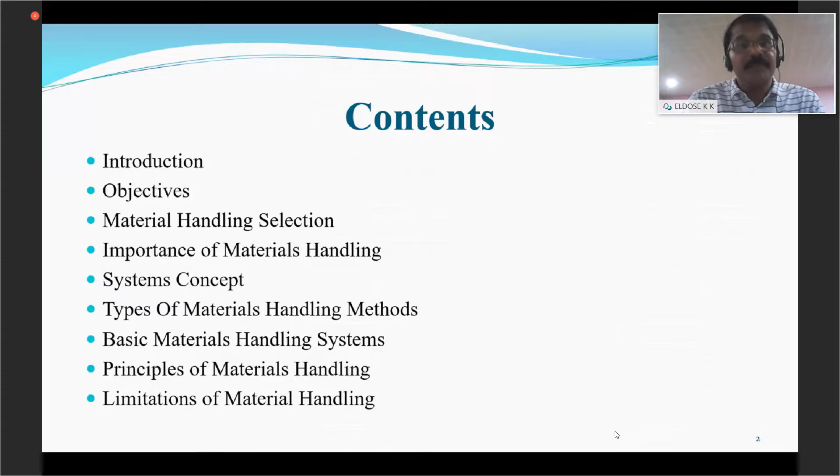So we start with introduction. Material handling means providing the right amount of the right material in the right condition, at the right place, at the right time, in the right position, and for the right cost by using the right method. We have to look into each term mentioned in this introduction statement very seriously.

It means providing the right amount of the right material. Right amount means the right quantity. So for a particular workstation, this much quantity of material is required. The material handling system shall be capable of transmitting that much amount of material to that particular workstation. That is what is meant by right amount, meaning right quantity of the right material.

Right material means the correct specified material reaching the workstation in the right condition. Right condition means it must be in usable form. There shall not be any damage while transferring materials from one place to another. So the material handling system must be capable and efficient to handle the material in safe condition, as well as deliver it at the right place.

A particular material is required for a particular workstation or workplace. That material shall be placed and transmitted to the right place at the right time. We all know that in a production scenario, scheduling is there—a particular time is allotted for a particular material. So raw material, in-process material, or finished material shall reach the particular work center at the right time, right position, and right cost—meaning we have to utilize all these cost-effectively.

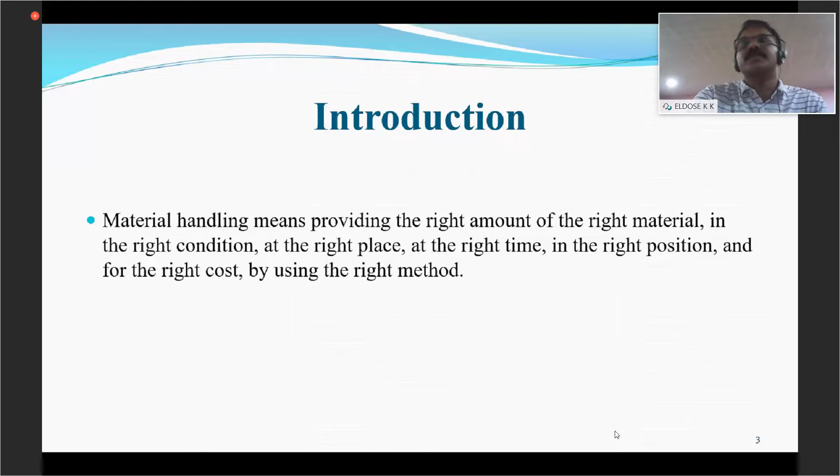Another aspect is that it applies to the movement of raw materials, parts in process, finished goods, packing materials, and disposal of scraps. So while transmitting or transferring materials, it may be in the form of raw materials, partially working condition material or part in process, finished work, packing materials, or scrap.

When we design any material handling equipment, it shall be capable of transmitting raw materials, in-process inventory, finished stock, packing material, as well as scrap.

Scrap is also very important because sometimes in big industries, scrap itself is huge—the weight may be enormous. So the handling systems must be capable enough to handle the scraps as well.

In general, hundreds and thousands of tons of materials are handled daily, requiring the use of a large amount of manpower, while the movement of material takes place from one processing area to another, or from one department to another in a particular plant. That means huge manpower is required.

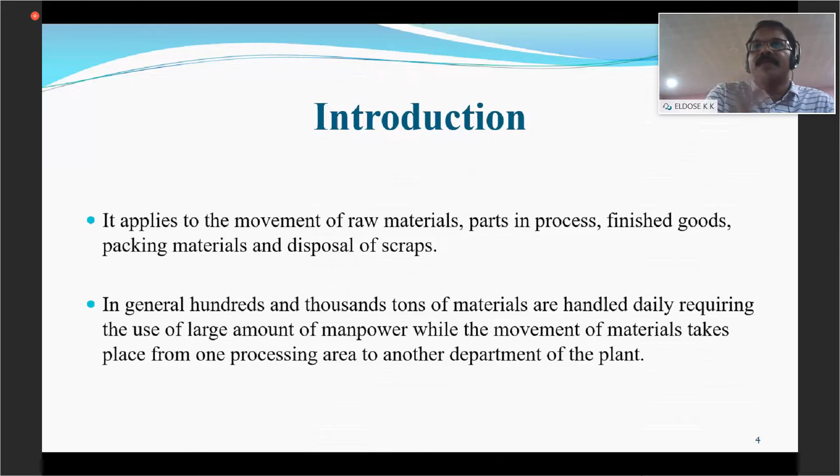Similarly, thousands of tons of material need to be transmitted, so it is very tedious work. We have to be very serious and take it into serious consideration in material handling, as far as an industry or production plant is concerned.

The basic definition of material handling is that it is the movement and storage of material at the lowest possible cost through the use of proper method and equipment.

Material handling involves two aspects: one is movement, the second is storage. Whether it is raw material, process material, or finished goods, we have to move that material as well as safely store it at a particular place, or keep it in inventory.

Both of these aspects must be done effectively, the cost shall be minimum, and proper method and equipment shall be used for transferring as well as storage of the material.

Another definition: material handling comprises all of the basic operations involved in the movement of bulk, packaged, and individual products in a semi-solid, solid, or liquid state, by means of machinery and within the limits of the place of business.

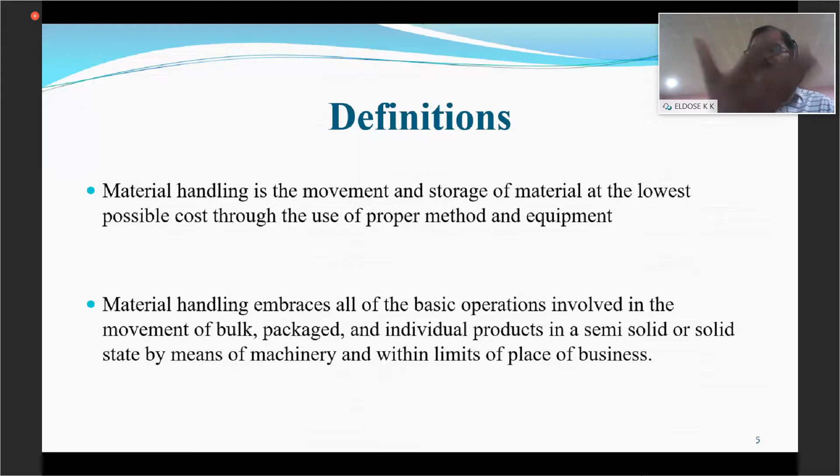Sometimes we have to transfer bulk material, sometimes unit material like individual products. The state of the material may be liquid, solid, or semi-solid. So according to the requirement, we have to design the material handling equipment for that particular plant.

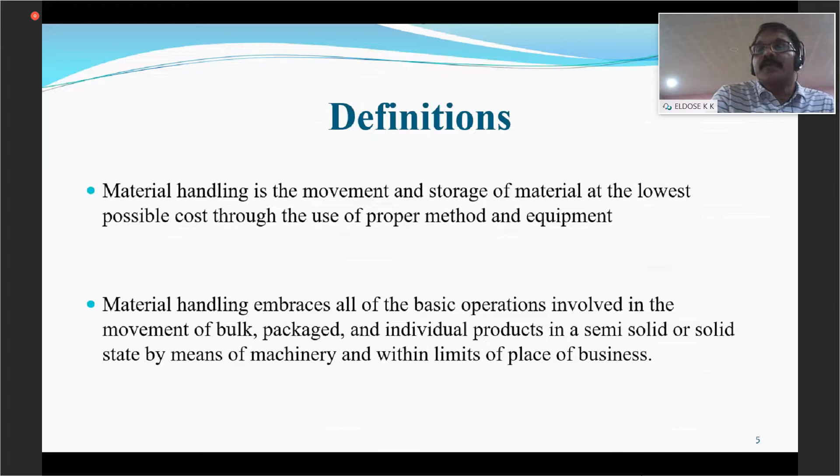The next one is the objectives of material handling.

The primary objective of material handling is to reduce the unit cost of production. In any manufacturing facility, the primary objective is to minimize the total cost or maximize the profit. In overall cost, one part is contributed by material handling, so if you reduce the cost of material handling, you can reduce the overall cost of production and maximize the profit. This is the main objective.

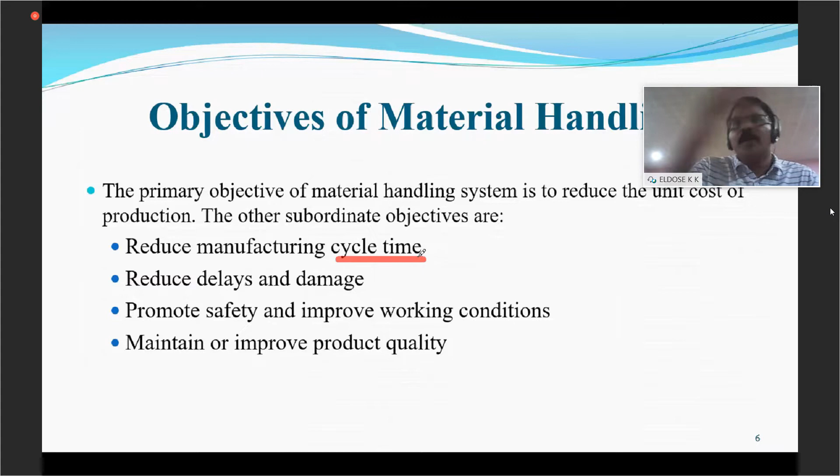Then the subordinate objectives are: reduce manufacturing cycle time. This is very important. What do you mean by cycle time? Cycle time means the overall time required for completing a particular product. During that operation time, some time is definitely required for material handling. So if you optimize the time requirement, you can reduce the overall cycle time for that production. So cycle time reduction is very important as an objective of the material handling process.

Then, reduce delays and damage—that point is also very important.

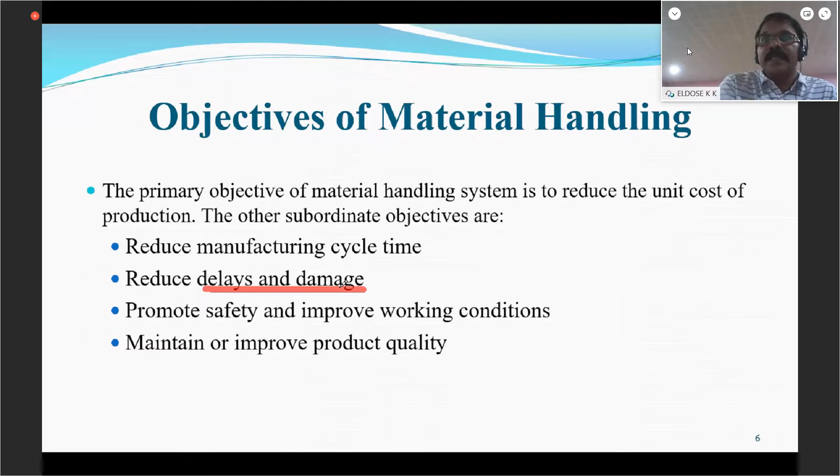Reduce delays and damages. For example, take an overhead crane used for transferring material from one place to another. When material is being transmitted through the crane, if some activity is carried out underneath, there may be a chance of an accident occurring. So we have to avoid that, as well as avoid unnecessary delay during the transmitting time. These two aspects are very important as far as the objective is concerned: delays and damage shall be reduced.

The third objective is promote safety and improve working conditions. In any industry, safety aspect is very important, and we have to take care of the machinery and the human beings. So we have to promote safety-enhancing techniques and activities, and improve working conditions. When you enhance safety, definitely the working conditions will be improved.

The fourth point is maintain or improve product quality. During the transfer of material from one workstation to another, we have to ensure that quality. Whatever the end product quality, the same quality we have to ensure during the transmission time as well. For example, suppose material is transmitted through a belt conveyor, and products placed on it are being moved from one place to another. During that transfer, there may be some hit in between workstations, so the surface finish may get damaged. So we have to ensure product quality during material handling as well.

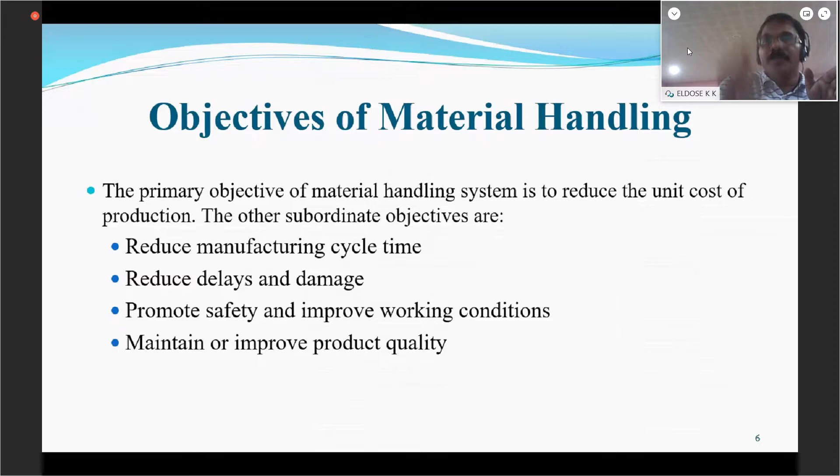Another objective is to promote productivity, meaning we have to increase the production rate. In order to enhance productivity, we have to follow straight line transmission, so material flows in a straight line, avoiding zigzag and unnecessary movements. We have to decide an optimum path and accordingly install or erect material handling equipment, so material moves as short a distance as possible. While transmitting material from one place to another, there are different paths, so we have to optimize the path so that the distance moved is minimum.

That is another objective. The next objective in this session is use the gravity concept. Wherever we can implement the gravity concept, we can use it so that we reduce energy and power requirements, because no energy or power is required if we utilize gravity. We can transfer material from a higher level to a lower level using some path, following the gravity concept wherever possible, which reduces energy and also enhances productivity.

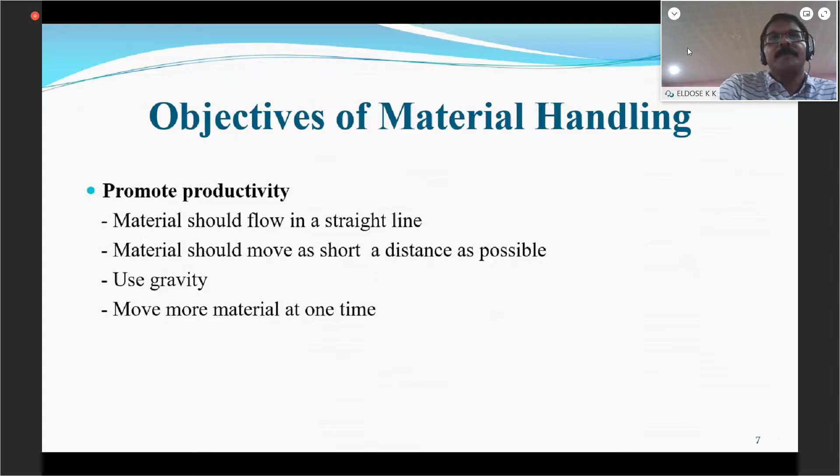Another aspect is increase the use of facilities; we have to enhance facility utilization. The first point is promote the use of building cube - we have to utilize whatever building area is available. Then purchase versatile equipment, meaning equipment that can perform different operations. Instead of using stringent, single-purpose equipment, we can purchase equipment that can be utilized in different environments and situations. So purchasing versatile equipment is very important.

Then develop a preventive maintenance program. Preventive maintenance is routine maintenance carried out in order to avoid breakdown. According to the requirement of different material handling equipment, we have to design different preventive maintenance programs. For one particular equipment, a certain procedure may be followed, but it may not be suitable or effective for another. So for another piece of equipment, we have to design another preventive maintenance program in order to avoid breakdown.

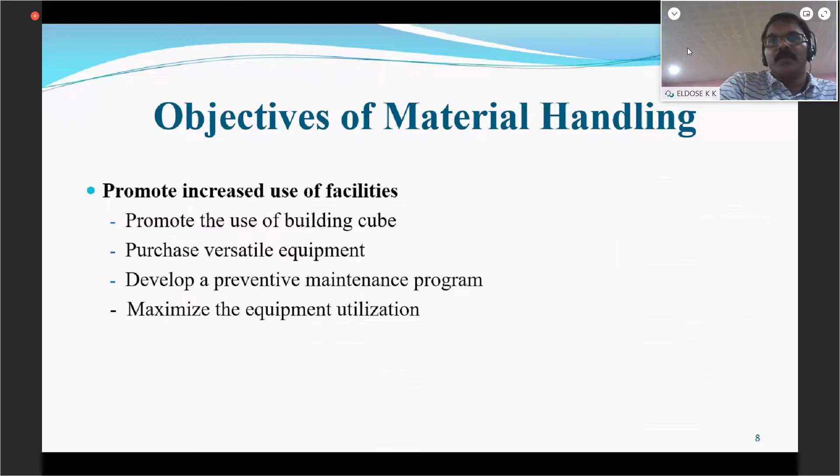Then maximize the equipment utilization. As we all know, equipment is available to us for 24 hours, so we have to utilize it at the fullest level - maximize the equipment utilization. These are the objectives that come under this particular category: promote increased use of facilities.

Next topic is material handling selection. There are different factors. First one is the properties of the material, whether it is solid, liquid, gas, and its size, shape, and weight. According to this heterogeneity, we have to design the particular handling equipment.

Take all these factors into consideration while selecting equipment. The second point is layout and characteristics of the building. Suppose for a particular plant the roof level is low, so we could not implement heavy material handling equipment. If it is a multi-story building, we have to select equipment accordingly. So based on the layout and characteristics of the building and plant, we have to select the handling equipment effectively. The next one is the production flow.

Production flow means whether it is continuous production, job shop, or batch production, we have to use different techniques. Continuous production means mass production, where the same quantity and type of material is produced for a particular period of time. For example, thousands or lakhs of the same nut and bolt produced in a month. That is called mass or uniform production. In that scenario, a conveyor belt is an apt choice. So according to the production scenario, we have to design the material handling equipment effectively.

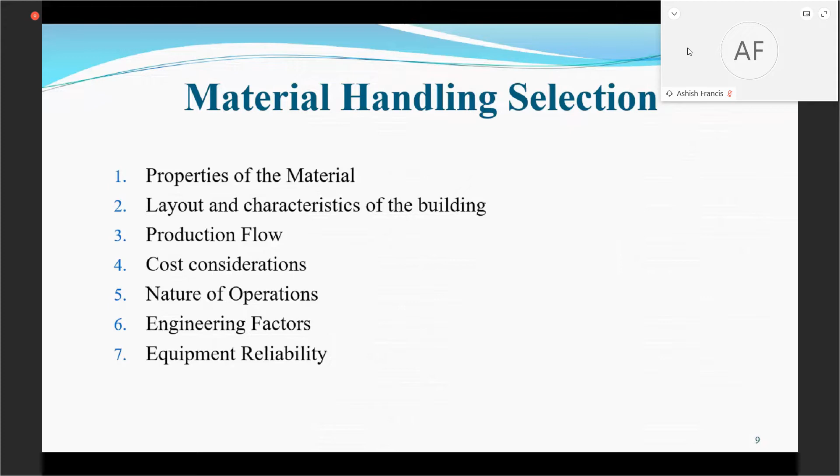Next topic is importance of materials handling. This is a summary of what we have discussed so far.

It improves the efficiency of the production system, and it's self-explanatory that it cuts down the indirect labor cost. It reduces damage of materials during storage and movement, as mentioned earlier. It maximizes space utilization through proper storage of materials, thereby reducing storage and handling cost. Using this, we can reduce the overall cost.

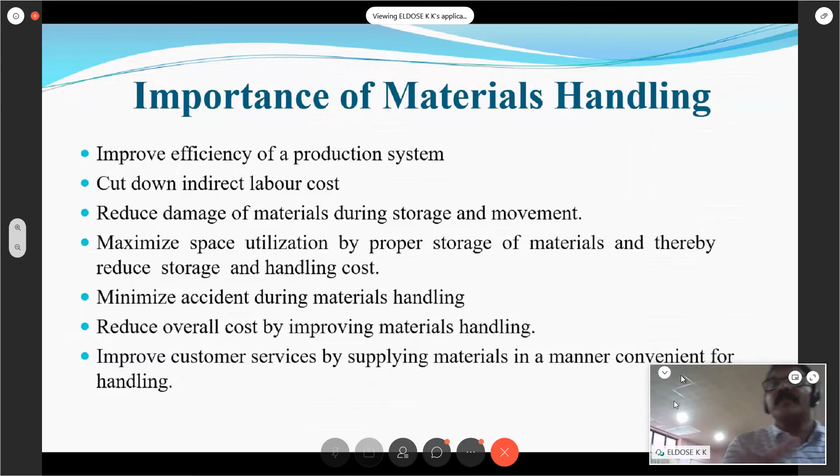Then it minimizes accidents during material handling, which is a very important safety aspect. It reduces overall cost by improving material handling, and it also improves customer service by supplying materials in a convenient manner for handling. So these are the importance of material handling.

The next important topic is what are the factors to be considered while designing a material handling system. The first factor is material.

The form of material, whether it is gaseous, liquid, semi-liquid, or solid, determines how we classify material handling systems. If it is a liquid, toxic, or corrosive material, we can use containers. If it is semi-liquid or powder, we can also use containers for transferring materials. If it is solid, we can use overhead cranes, hoists, or trucks.

The next aspect is nature, whether it is bulk, unit load, individual items, fragile, sturdy, or bulky.

What is a unit load? It means the same material with the same dimensions and similar appearance. For example, take a brick - different bricks have the same size, dimensions, and appearance. Similarly, if you place ten such bricks in a casing, that may be considered a unit load and loaded onto a truck. That is what is meant by the unit load concept.

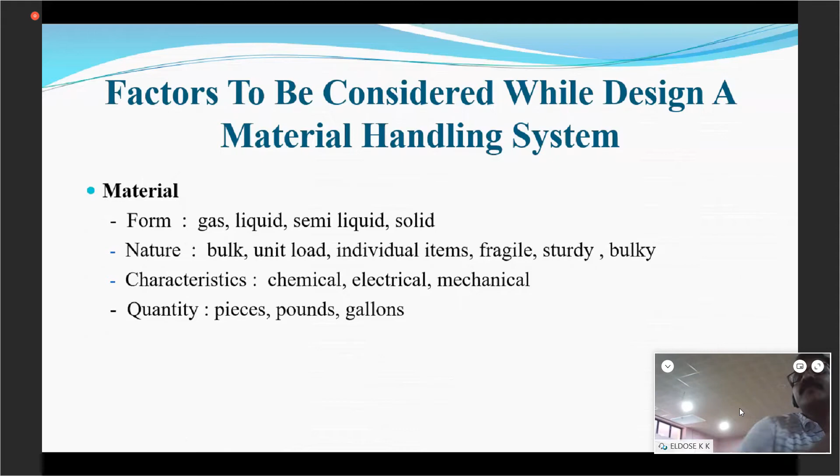Whereas bulky means the material size may be different, so for bulky material transmission we have to use different material handling equipment. If it is fragile, we have to use equipment accordingly, and if it is sturdy, we have to use equipment accordingly as well.

The next factor is characteristics, whether chemical, electrical, or mechanical. Accordingly, we design and select equipment as per the requirement. Then quantity, whether in pieces, weight in pounds, or liquid form in gallons, is another factor to consider in the design.

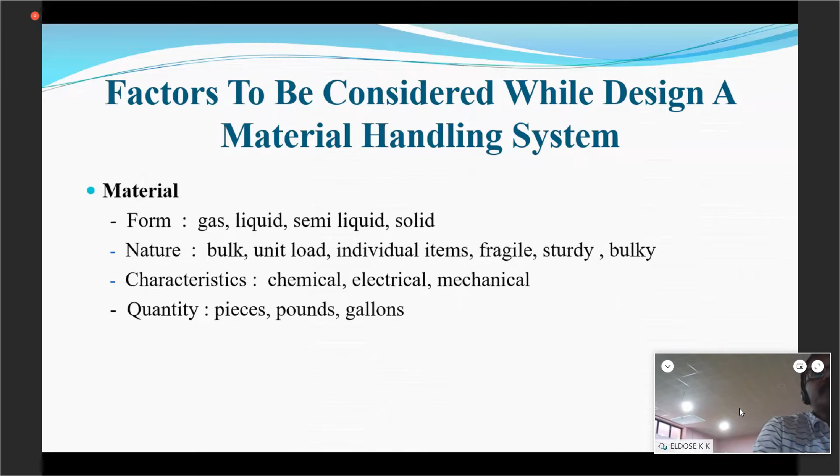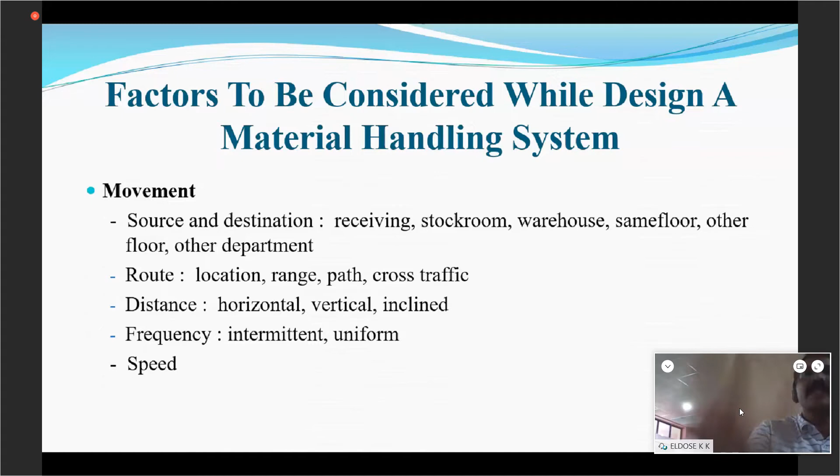Then frequency - whether it is intermittent production or uniform production. Uniform production means continuous mass production, while intermittent production also requires accordingly designed systems. Then speed is also very important - the speed at which material is being transported is another factor.

Another factor is methods - whether unit or load, manpower, or equipment. Whether it is bulky items, individual items, or container items, we have to consider this factor. Manpower means whether a single person or several people are involved, or none, meaning we can mechanize the system. Then equipment - conveyors, overhead cranes, forklifts, trucks - different equipment can be selected according to the requirement.

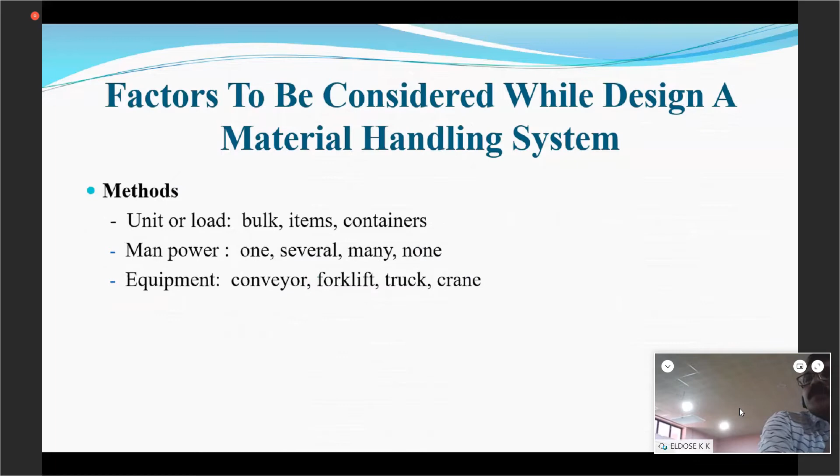The next topic is the systems concept of materials handling.

The system concept means if we take a production system as a whole, that may be considered as a system, but material handling is a subsystem of that main system. In order for the main system to work effectively, the subsystem must also work effectively. The material handling area is very important for a production system - unless it works properly, the total system won't work effectively. So this area may be considered a subsystem, and all subsystems must work together, synchronized, to improve the effectiveness of the main system. This is the system concept of material handling.

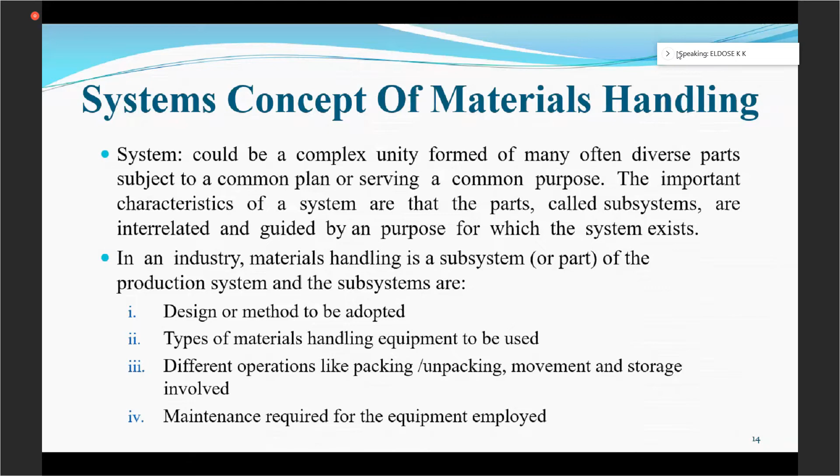Then types of material handling methods. There are 5 types. One is the movement - this is nothing but the actual transportation, the actual movement of material from one place to another place.

The next one is quantity - how much we can transfer, how much volume we can transfer. This dictates the type and nature of the material handling equipment, and also the cost per unit for the conveyance of the goods. Next aspect is the time.

How quickly the material can be moved from one place to another place. If we have to move very quickly, accordingly we have to select the handling system. Then space requirement - if the available space is very less, we could not erect big material handling equipment, so space is a constraint. According to the available space, we have to optimize the material handling equipment.

The next one is control. Control means the proper identification of the material, proper inventory management - all these aspects come under the control area. So these are the different types of material handling methods: 5 methods - movement, quantity, time, space, and control.

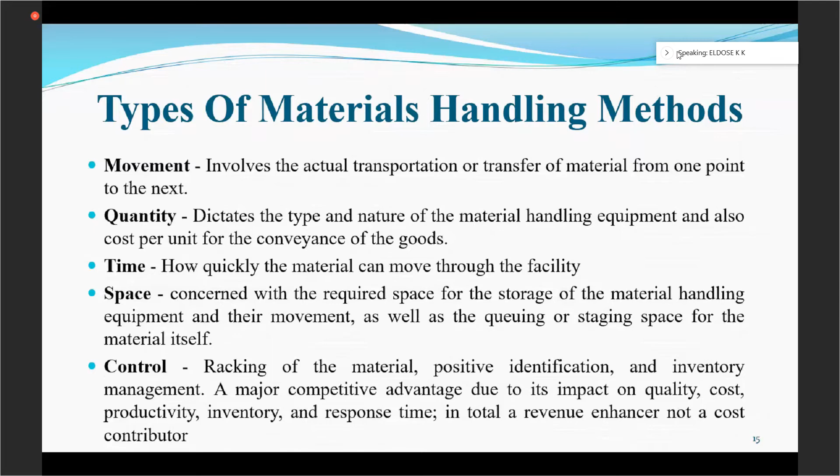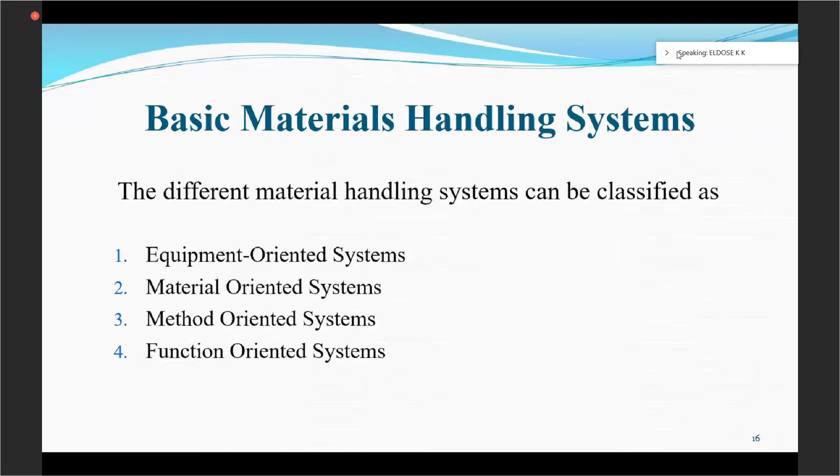Then basic material handling systems. The different material handling systems are: one is equipment oriented system, the second one is material oriented system, the third one is method oriented system, and the fourth one is function oriented system. These are the 4 different material handling systems.

The first one is equipment oriented system. From the heading itself, it is very clear that it depends on the equipment. What are the types of equipment used for the transportation? One is the overhead systems, like overhead cranes, jib cranes, and so on. Then conveyor systems - belt conveyors, roller conveyors. Then tractor trailer system, forklift truck and pallet system, industrial truck systems, and underground systems. These are the commonly used equipment in the material handling scenario.

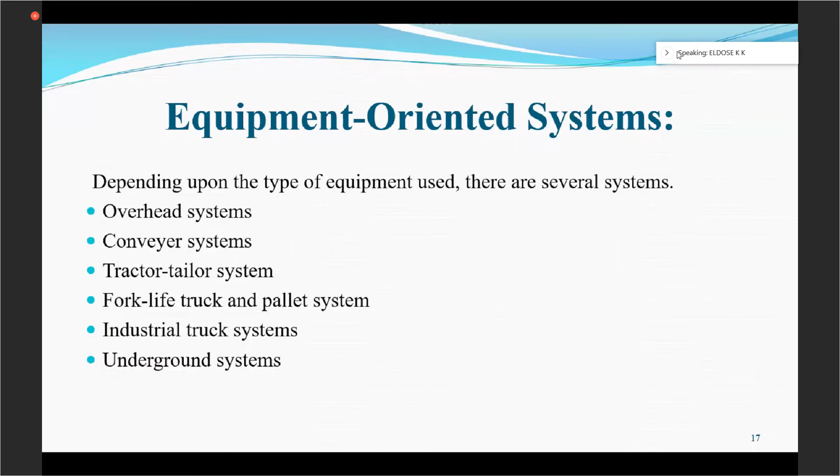Then another system is material oriented system. This we already explained - unit handling systems, whether that particular equipment is handling units only. Unit means, as I mentioned, same type of material - all similar, which may be transmitted from one place to another. That is unit handling system. Bulk handling system means it is not similar. Then liquid handling system means the form is liquid.

A unit load consists of a number of items so arranged that it can be picked up and moved as a single entity, such as a box. As I mentioned, it may be considered as a box, bale, roll, etc. Such a system is more flexible and requires less investment. So the unit load concept we can follow because it involves less cost.

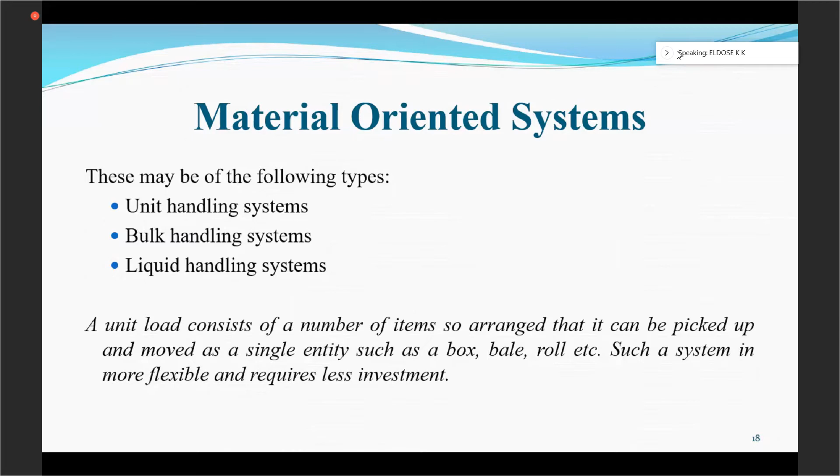Then another type of system is method-oriented systems. According to this system, we classify them such that manual systems is very clear - there is no automation or mechanization, it is being operated manually. Then the next one is the automated system. Then job shop handling system - job shop, as I told you, job shop production means different types of materials are produced at a particular time. Then mass production means uniform production, the same type of products being produced at a particular period of time. So this is method-oriented systems.

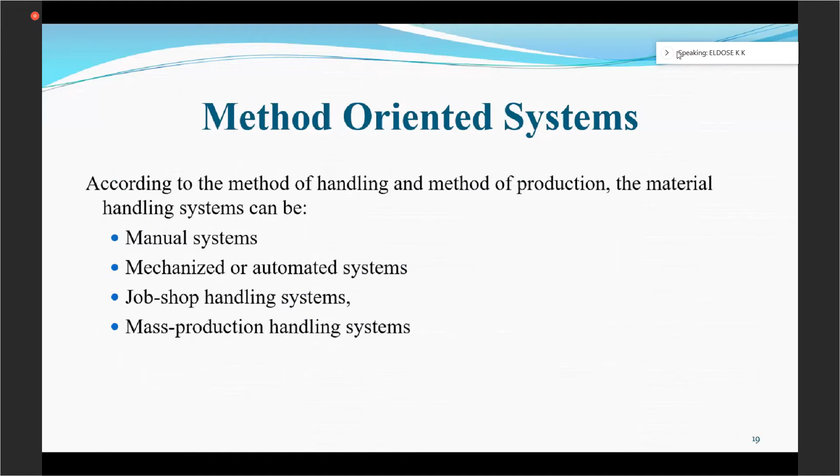Then the last one is function-oriented systems. There are transportation systems, conveyor or conveying systems, transferring systems, and elevating systems - these are the 4 classifications of function-oriented systems. Elevating system means it may be elevated from one point to another point, raised in an elevator system. Transferring system means it is being transferred from one place to another place. Like that, conveying and transportation - it is very clear.

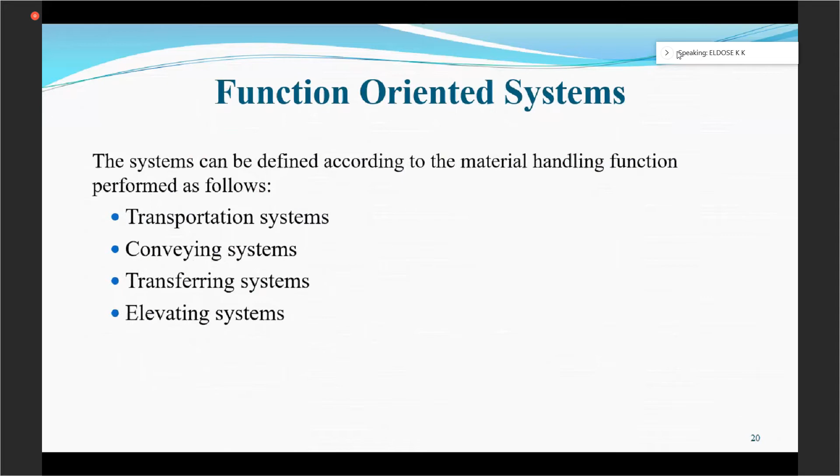Then factors affecting selection of materials handling equipment - all these points are self-explanatory. With the present discussion, till now we have discussed many things, and these things we can easily follow. One is flexibility - flexibility means the material handling equipment is capable to handle different types of materials. The flexibility shall be there. Then load capacity - for a particular equipment, we have to ensure the maximum load capacity.

Then speed - we already mentioned that time, if that operation is being done quickly, we can improve the productivity as well as reduce the cost. So speed is important. Then space requirement, already explained, the available floor area we have to utilize.

Whatever be the available area, we have to utilize the available space.

Then supervision required. The level of supervision, if it is a manual one, 100% supervision is required. If it is an automated one, that supervision level may be 10% or 5%. If it is partially automated, that level of supervision is required, so that also we have to take into consideration.

The ease of maintenance, as I mentioned, is very important for each and every equipment. As we already discussed, we have to design a program for preventive maintenance, so ease of maintenance is important when we select equipment. Then environment is also a factor, cost is also a factor. This is self-explanatory.

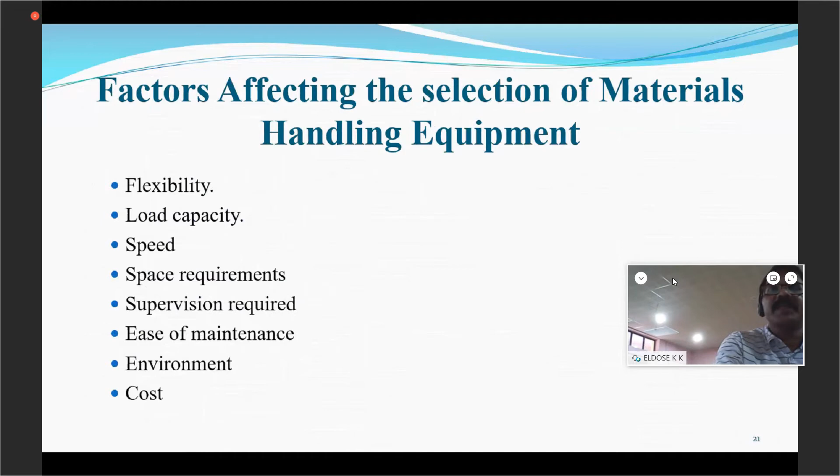Then the last topic of our discussion is principles of material handling. I mentioned around 20 principles. Part A is principles related to planning and part B is principles related to equipment. This is a thumb rule. I mentioned 20 principles, but it may not be possible to implement all principles. Sometimes we cannot implement one principle in a particular situation, that principle may be utilized in another situation. So that depends on the situation or the requirement. We can follow these principles.

So the first one is the planning principle. It is very easy to understand. Then the system principle, I already mentioned. Then the simplification principle means that equipment shall be simple, the operation procedure shall be simple. So we have to follow that simplification procedure in order to utilize the equipment effectively.

Then material flow principle means the smooth flow of material. We shall avoid zigzag movement and unnecessary movement. So material flow shall be optimum, and we can follow straight line flow.

Already we discussed the gravity principle. It means that without using any energy or power, we can transfer material from one place to another using the gravity concept. The unit size principle also we discussed - we can have unit size of material so that transportation is very easy.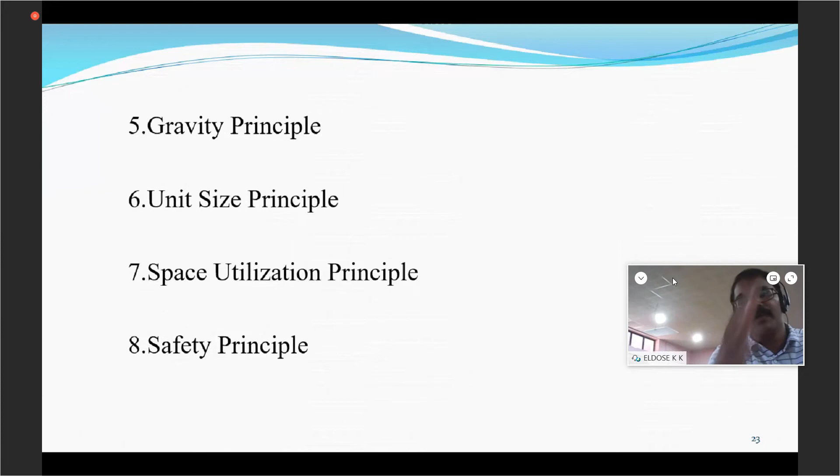These are the principles that come under the planning header. Then the remaining 12 principles come under principles related to equipment. Then mechanization principle - to what extent this equipment can be automated in order to improve efficiency and productivity. What extent we can mechanize or automate the equipment, that is what is called the mechanization principle.

Flexibility principle, we already discussed. Flexibility means that particular equipment can do different operations. It is flexible, it is adaptive. That is what is called the flexibility principle.

Then the third one is equipment selection principle - we have to select the equipment according to the requirement and effectiveness. Then standardization principle - standardization means some equipment are standardized, so we can operate that particular equipment safely and effectively even by an unskilled worker. So standardization principle we have to follow wherever it is required.

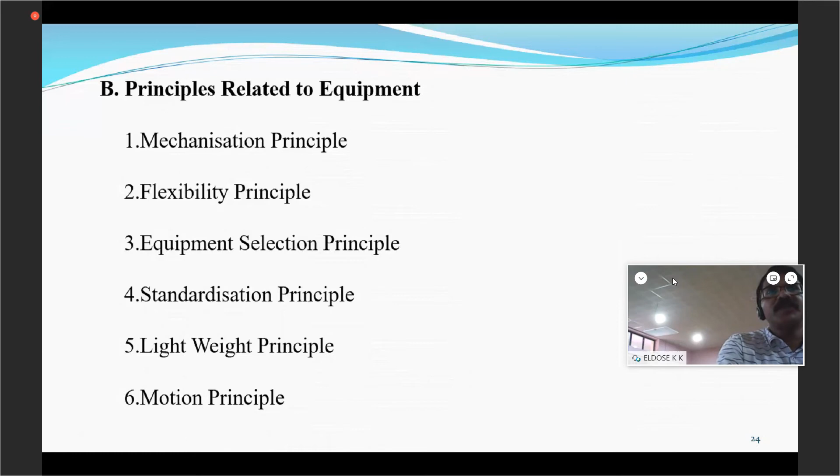Then lightweight principle, it is very self-explanatory - we have to reduce the weight of the equipment as far as possible. Then motion principle means the movement also we have to optimize.

Idle time principle means we have to reduce the idle time, that means effective utilization of the equipment. Accordingly, we have to select the material. Suppose an industry is producing small weight equipment, we need not use cranes. So we have to design and select our equipment according to the requirement so that the idle time is reduced. Then obsolescence principle.

Obsolescence principle is also very important. Sometimes when updation is coming up, we have to update the equipment. If it is obsolete, we have to change it, otherwise the productivity won't increase. So obsolescence principle we have to follow if it is required.

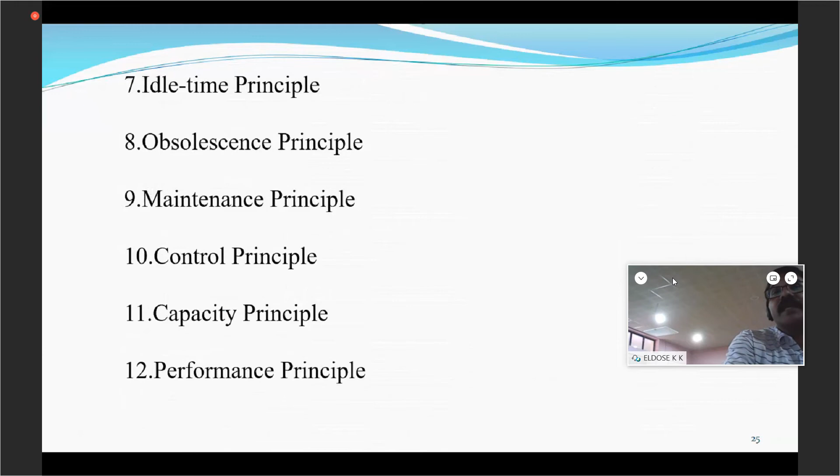The maintenance principle is very clear - we have to have a clear maintenance procedure. Then control principle, then capacity principle, then performance principle. These are the 12 principles of material handling under equipment, and 8 more principles come under principles related to planning. So total 20 principles are there.

As I mentioned, it is a thumb rule, so we have to use our wisdom as to which principle may be used in a particular situation. Using some trial and error method or discussion, we can select different principles or combine principles according to the requirement.

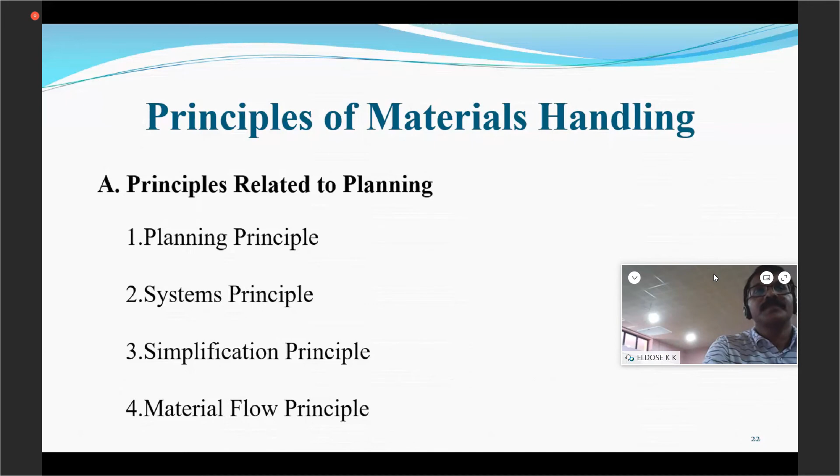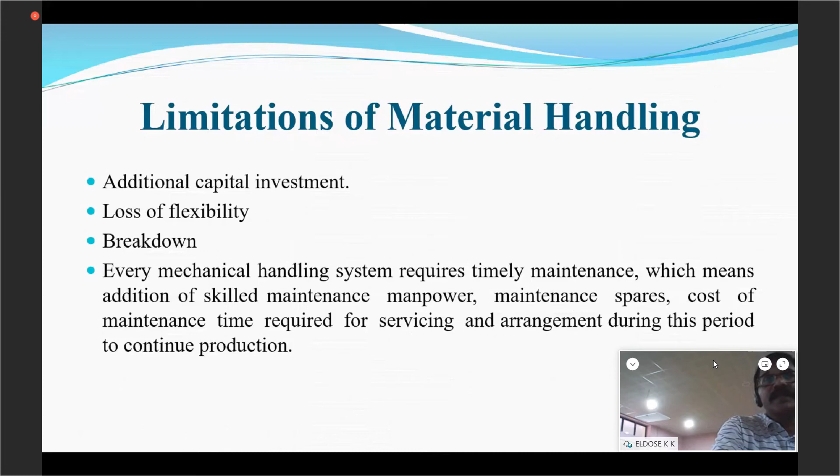It's very clear. Yes, sir, the session was very clear and we have reached the last 15 minutes of the session. Sir, could you please conclude the session by giving an overall summary? Okay, sir. So we will move on to the QA.

As I mentioned in the first part before the introduction, in many industries this material handling area may not be considered seriously. So that is an important aspect of any production scenario. I focused this particular session in view of the production scenario, but this material handling aspect may be extended to any area. I focused on the manufacturing area, manufacturing aspect.

I focused to explain all these things. But this material handling area is very, very important. We have to consider it seriously. Otherwise, the total cost or the profit we cannot optimize. If we have a very effective material handling system, we can maximize the profit, we can reduce the cost.

As I mentioned, in system concept, this material handling is a subsystem. If you take the production scenario as a whole system, this material handling is a subsystem. We know that in system concept, if one subsystem cannot perform effectively, what happens? The performance or the effectiveness of the whole system will break. We won't get the maximum effectiveness from the main system. So the subsystem also has to work effectively in order to get a good result. So in system concept, this material handling is a subsystem in a production system.

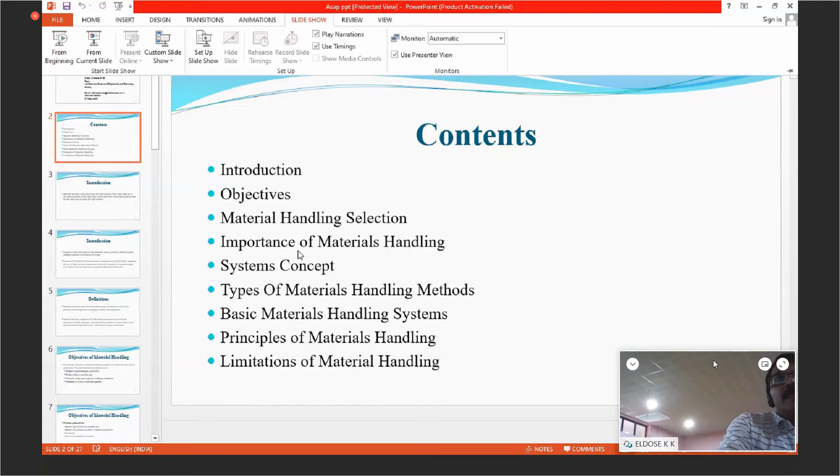So material handling is very important as far as a production or manufacturing scenario is considered, as well as the principles of material handling. The unit size principle, gravity principle already mentioned - all these things are very, very important. That is practiced in all industries.

So one important aspect is, out of these 20 principles, we have to select the optimum principles for a particular situation. That is what effective decision-making is. So for a particular industry or production scenario, what all principles shall be utilized? What all things can be implemented in order to increase the effectiveness or increase the productivity? So out of these 20 principles, we have to select the optimum principle for improving productivity as well. That is a thumb rule, as I mentioned.

According to some experience, sometimes some experience may be required, some trial and error method may be followed in order to select good principles. As a mechanical engineering student, this material handling area is very important. Wherever you go, when you go to any industry, you will experience this aspect, material handling. When we think about material handling, we thought it is a very simple process, but it may not be like that. See, 1 ton, 2 ton, or 3 ton materials may need to be transported in a restricted area without any damage. It is very difficult, so we have to design an optimum system for that. This area is very important as far as any mechanical industry is concerned.

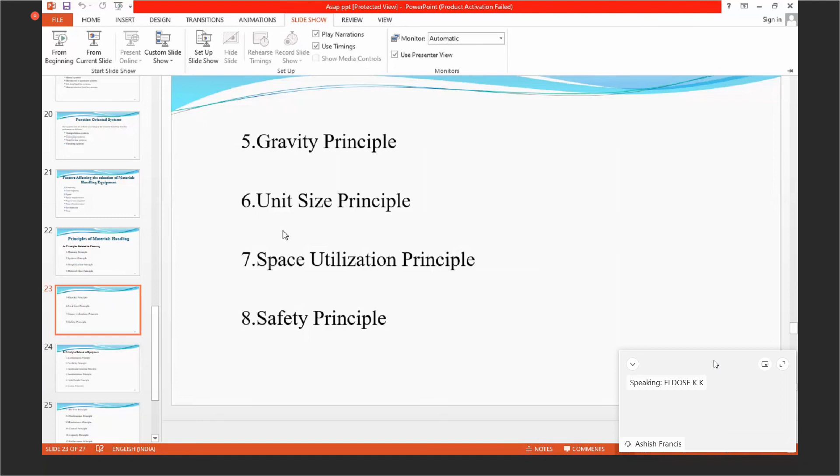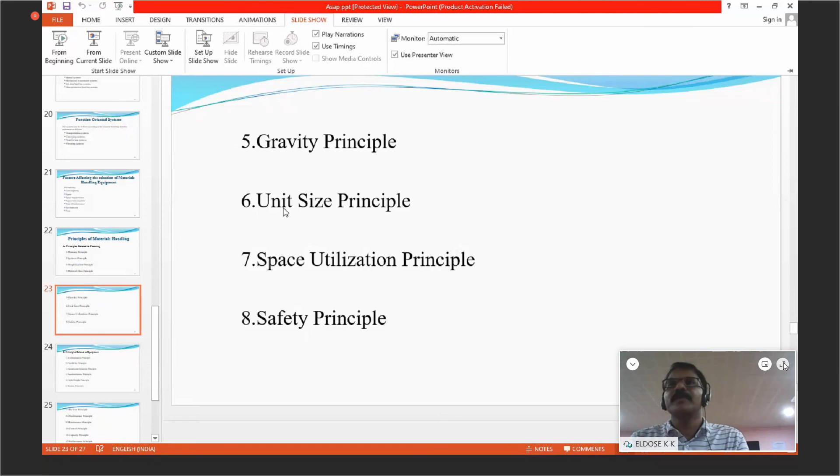Safety is one important aspect. Nowadays, in many big industries, huge big materials are being transported from one place to another, so manual transportation is very difficult. So in order to enhance the safety aspect, in order to enhance productivity, in order to enhance effectiveness, definitely sometimes you have to go for mechanized systems.

If it is a very small industry where small equipments are being produced, material handling automation may not be needed. But if it is a big industry where big products are being produced, we have to look into automation, and decide the level of automation - whether partially or fully automated - considering the safety aspect. Safety is very important.

I have received a question from Evin. He's asking which is the best textbook for this topic. Actually there is no single textbook for this, we have to refer different textbooks. But in many production-related textbooks we will get these materials. Some ready-made textbooks are available, but I will not recommend those textbooks because that won't enhance your knowledge.

In order to enhance your knowledge, you have to read good textbooks. But for material handling and facility planning as such, there is no good textbook to my knowledge. But production-related good books are there, where you will get all these ideas.

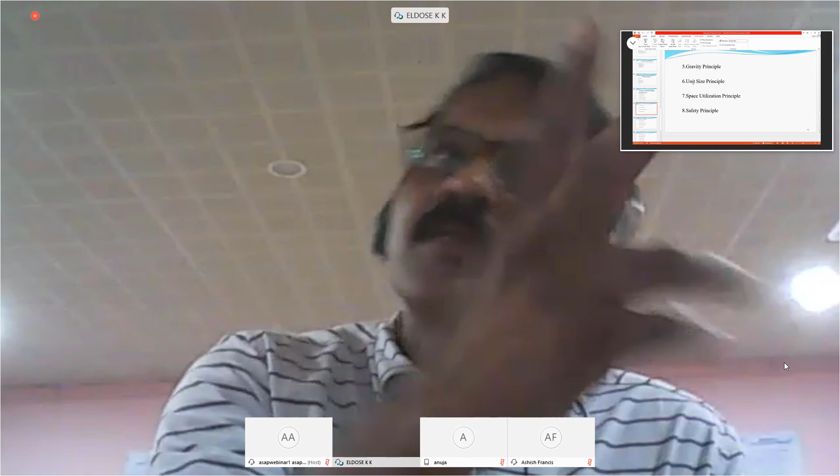The challenge is, suppose in order to start the work at say 10 o'clock, we need to start the transportation of the raw material or the material handling at say 8 o'clock. So we started at 8 o'clock, assuming that within 2 hours it will reach here. But during this 1 or 2 kilometer journey, different obstacles may come.

Sometimes the roads may not be that much width, obstacles come in between. So we have to redesign the arm of the vehicle in order to move it smoothly. Material handling is always a challenging area, and as I mentioned already, it is very important in order to enhance the effectiveness of the whole system. So material handling is a very challenging area, and so many updations and new inventions are coming in that area.

Is it clear? Okay, so that was clear. Yes sir, that was clear. So I hope we have answered all the questions raised by the students.